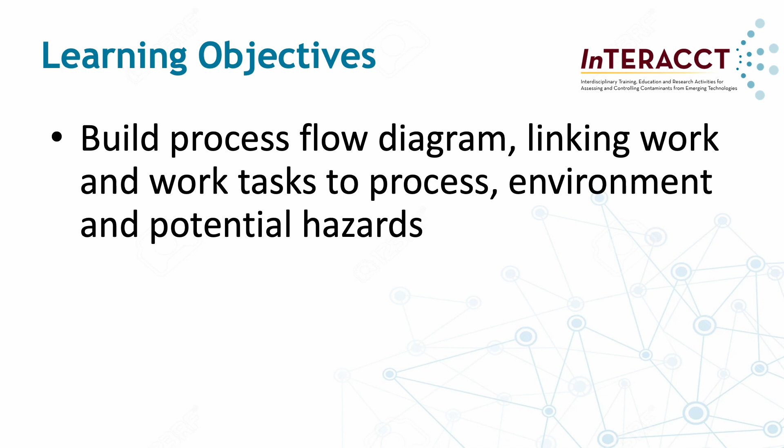The learning objective of this module is to build process flow diagrams, linking work and work tasks to process, environment, and potential hazards. Let's start by taking a closer look at this technology by reviewing the major process steps.

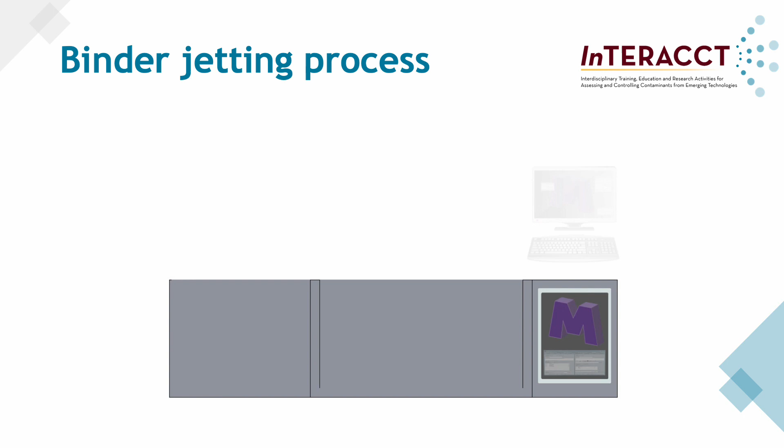The first step in the AM process is to create a 3D representation of the product using CAD software. That file is imported into the printer software to guide the printhead. There is a powder reservoir and a build platform. To start this process, the reservoir is filled with powder. A roller or wiper blade rolls a layer of powder from the reservoir onto the build platform.

The printer head applies one layer of binder, and then the binder is initially set by having an infrared lamp array pass over the top. Then the build platform lowers, the level of powder in the reservoir is raised up, and the process repeats until all the layers have been printed.

What you end up with is referred to as a green part, the part made of powder fused together with binder, submerged in a bed of unfused powder. This is an important feature of the method because it doesn't require any support materials to be integrated into the design, which is a thing that is necessary for some other methods.

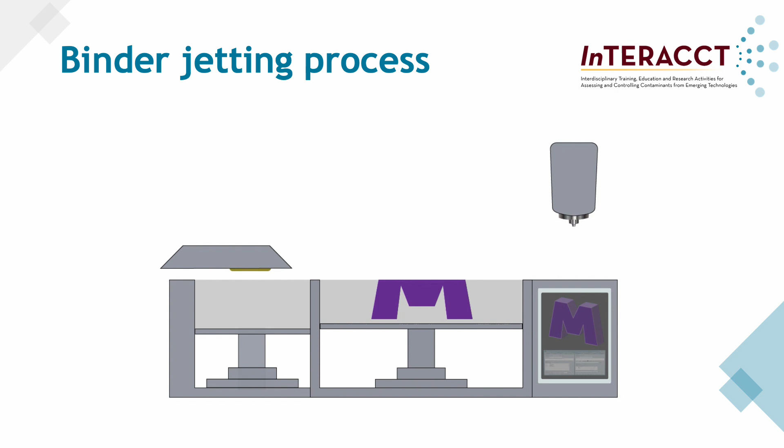Next, the green part, in its box of powder, is placed in an oven, usually overnight, where the application of heat cures the binder enough that the green part can be handled without breaking. Then it has to be removed from the bed of loose powder. This is usually done by digging the part out with a spoon or spatula of some kind, and then the harvested part is cleaned by having the loose powder blown off.

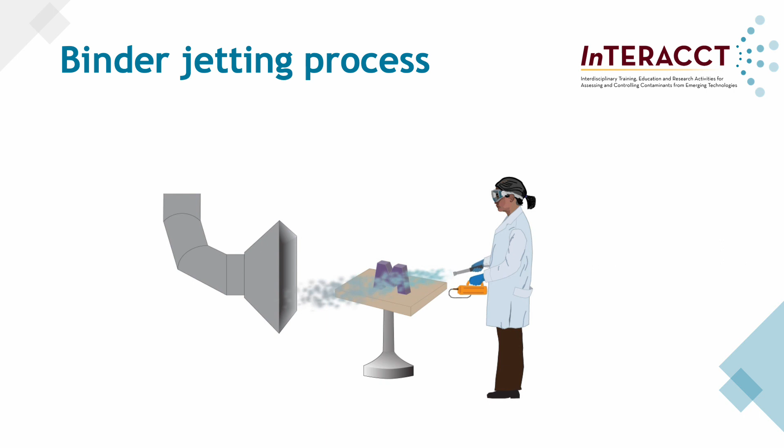This can be done in a glove box, something like a fume hood or downdraft table, or simply out in the open, depending on the particle size of the loose powder. After that, the green part is generally sintered in a furnace to remove the binder and fuse the powder material into a finished part. Sometimes they'll also backfill the voids created by elimination of the binder with a second material like bronze.

The process in this binder jetting example starts with preprocessing, shown in the pink starting oval. Bulk materials such as binder, solvents, and powders are obtained from a vendor. Optionally, these materials may be transferred to smaller containers, and the potential interaction between the worker and materials could present an exposure opportunity, in this case metal powders, which we'll talk about more in a minute. Steps for possible exposure to hazards will be highlighted in red text boxes with white text and a white border.

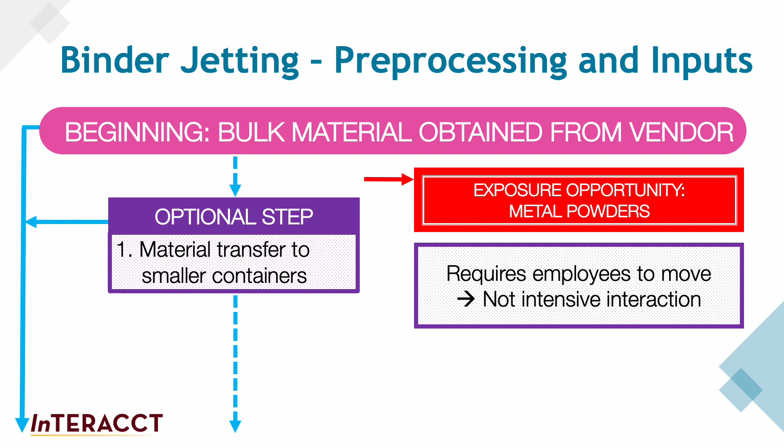You'll see process steps requiring employees to move parts or pieces of equipment from one location to another, but no intensive interaction with materials, in purple with a faint dotted pattern in the back. Occasionally, the print head is cleaned using a solvent solution as noted in Step 2. In Step 3, the binder reservoir is loaded with binder on an as-needed basis. The binders can be furan-based, phenolic-based, silicate-based, aqueous, or solvent-based.

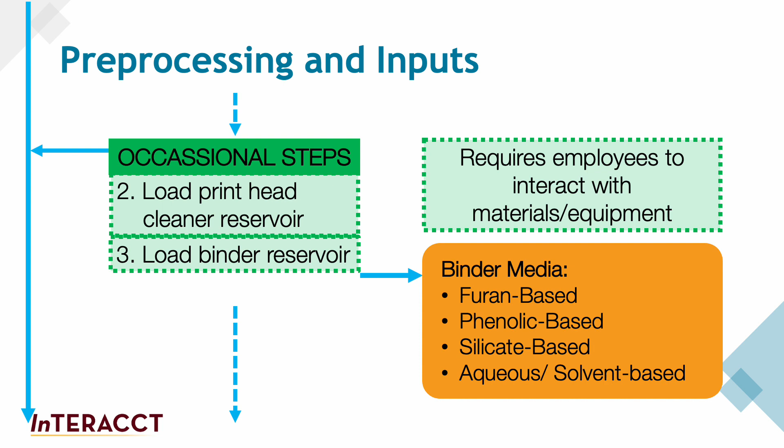Occasional steps will be clearly labeled as such. In addition, processing steps that require employees to interact with materials and equipment will be in green boxes with the dashed border pattern as we continue through pre- and processing steps. In Step 4, the job box is loaded with powder, completing the pre-processing steps.

As noted, print media powders include polymer powder, mineral sand or powder, metal powders including bronze, stainless steel, tungsten carbide, and other alloys, and ceramic. Outputs include the product and fugitive emissions that we'll discuss in more detail shortly.

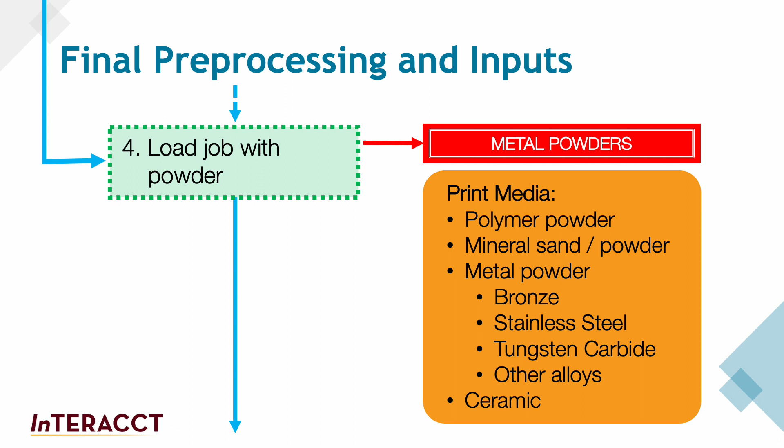Next, the green part is printed. Going forward, steps in blue with a solid border and backgrounds are processing steps that do not require employee interaction. As shown here, the printing step does not require employee interaction, but emissions of volatile organics could pose an exposure risk.

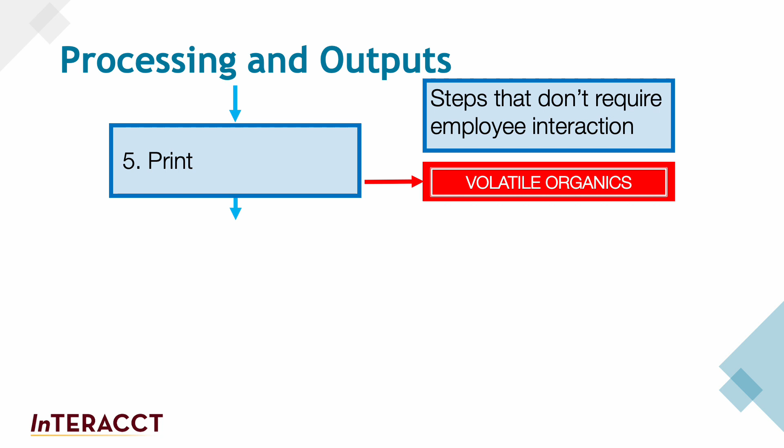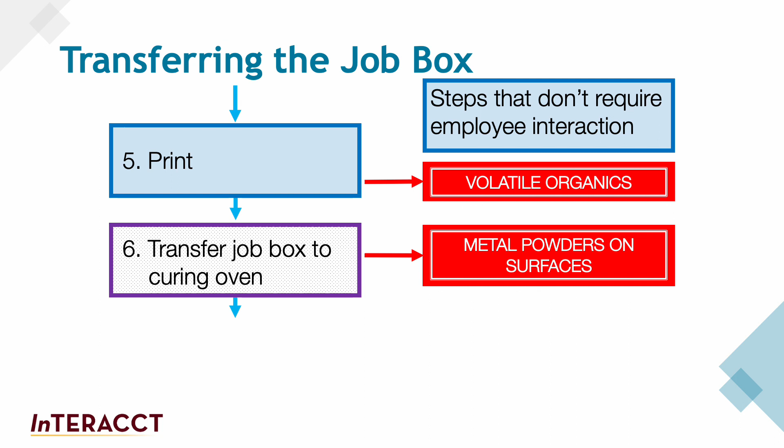Once done, the job box containing the green parts, submerged in the powder, is transferred to the curing oven in Step 6. Again, as shown with a purple border and a dotted background, intensive interaction with materials is not occurring at this step, but employees do move parts or pieces of equipment, making this a point for potential contamination. In this case, metal powders can be found on surfaces.

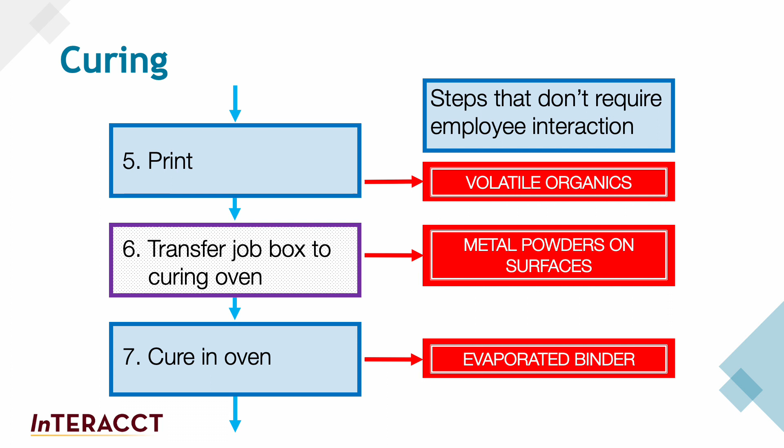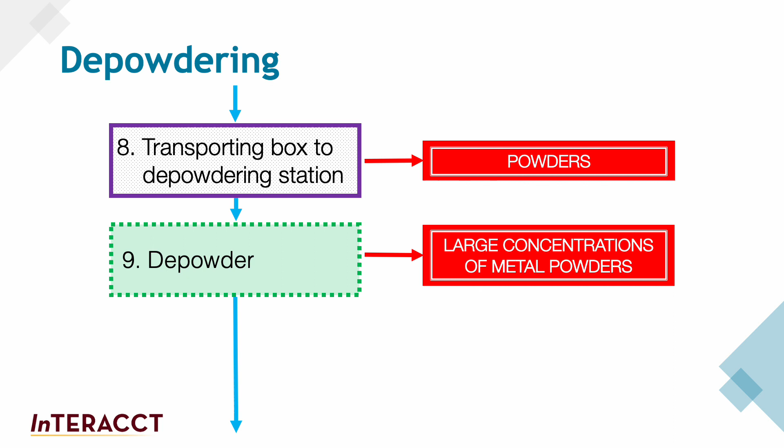Next, the parts are cured in the oven, at which point the binder evaporates. Then the parts are removed from the oven and transported to the depowdering station. The part is depowdered. In both these steps, the potential for interaction with powders represents an exposure risk. Next, sintering happens. The part is transferred to the sintering furnace where it is sintered. During the transfer process, residual binder is also a potential exposure risk. Finally, the sintered parts are removed from the furnace.

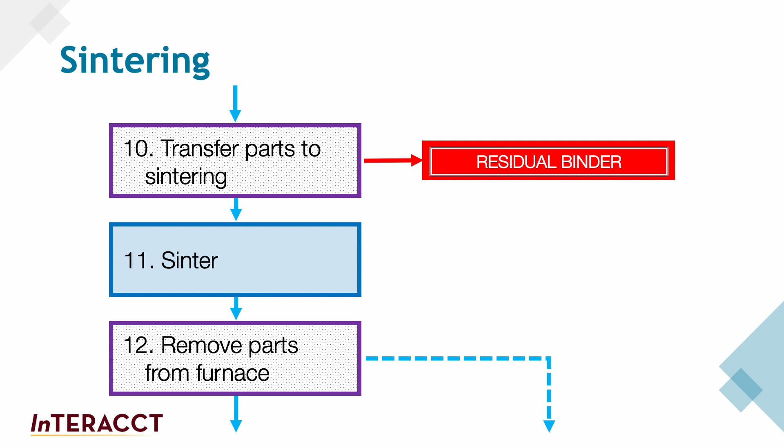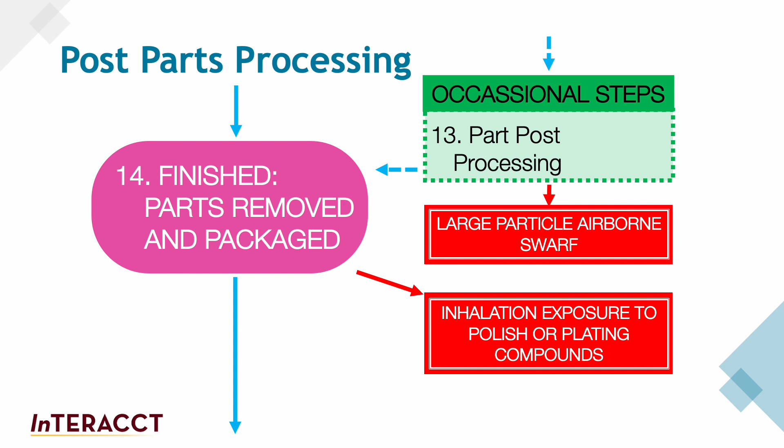Depending on the part and its application, further processing, such as milling or polishing, may be occasionally necessary, at which point large particle airborne swarf is a potential exposure risk. The finished part is removed from the processing area and packaged for shipment. Finally, during post-printing and processing, at some lesser frequency, the printer may be cleaned or equipment changed over.

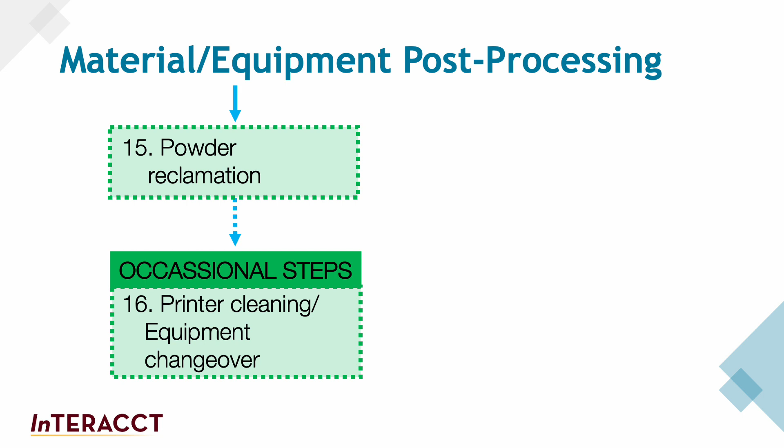Collectively, these materials present a wide range of hazards, from nuisance irritation associated with general particulates to systemic effects like carcinogenicity and sensitization, and reproductive hazards associated with some of the binder components. An interesting note is that a lot of the inhalation and dermal exposures in binder jetting occur during the harvesting task when the parts are removed from the powder bed, not during the printing itself.

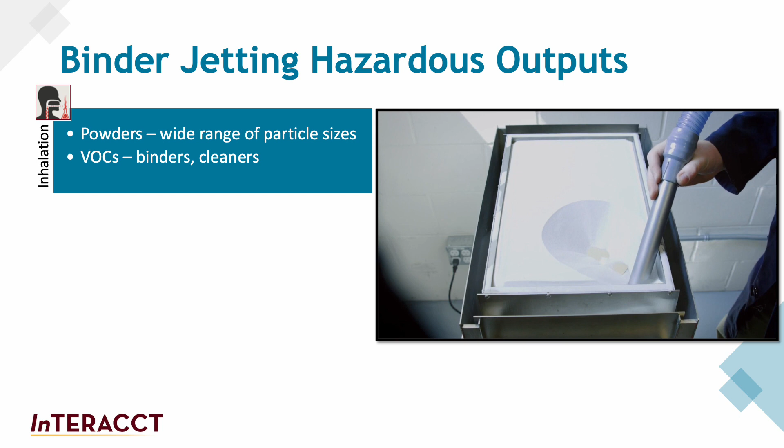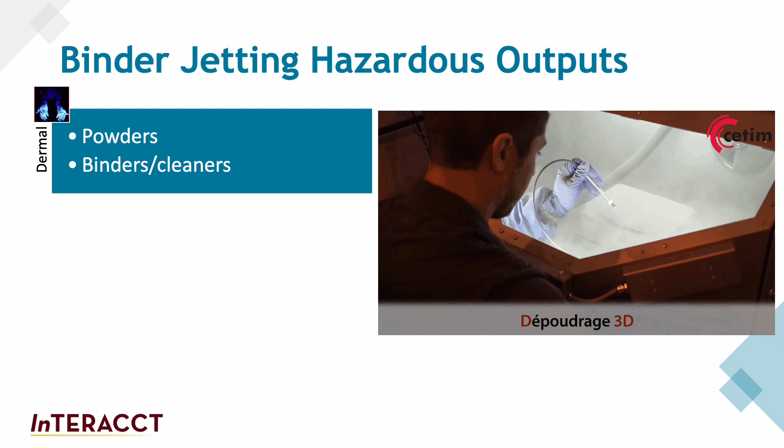The printer manufacturer's demo videos imply that the process looks a bit like the image on the right, with large particle sizes that fall neatly into place and are easily suctioned away. But in the real world, the powders look a lot more like this, with very small particulate sizes that move about the workspace freely. You can see this technician is using a glove box to clean his parts, a practice that we highly endorse.

A critical element of assessing AM-related exposures is to observe the process in the labs or workspaces and to determine the various tasks of each printing method where exposures are likely to occur. This is important for determining similar exposure groups and for determining how and where to break up or combine tasks for sampling or modeling purposes, considering parameters such as duration, frequency, and types of engineering controls.

For binder jetting, our task monitoring was based upon mixing and loading powder, for materials that require mixing, of course, printing, and parts harvesting. For materials that did not require mixing, the loading powder was so short that it proved impossible to get a detectable result at a usable quantitation limit. So for those runs, mixing and loading and printing were combined.